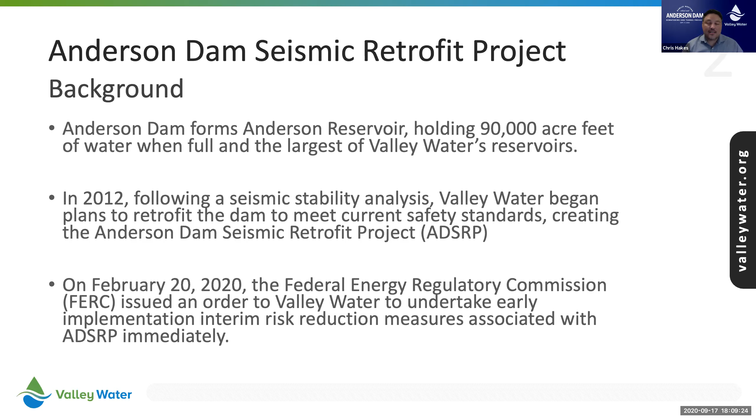That happened, not an earthquake, but the level above the seismic restriction happened in 2017. So that kind of spooked them in conjunction with what happened at Oroville, where they saw that there might have been an imminent dam failure. They wanted to basically be extra safe. So they requested that we do several things, or directed, I should say, us to do several things.

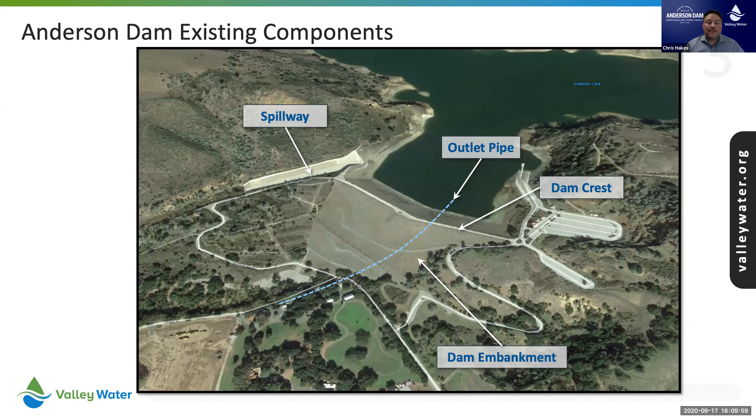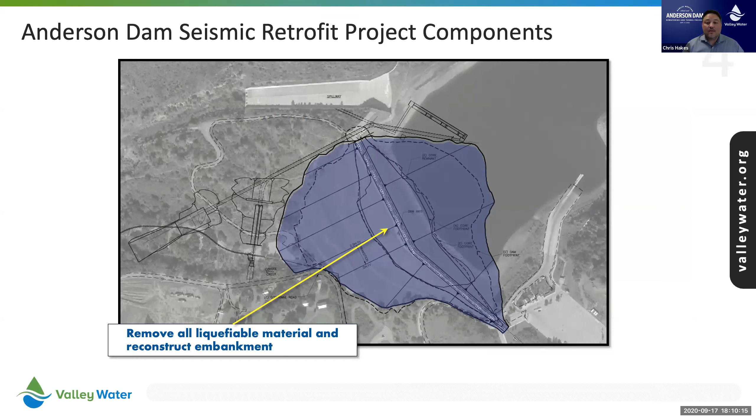We have our dam crest, which is basically just the roadway that runs across the top of the dam embankment, and the dam embankment itself. This was the seismic retrofit project after a few evolutions. You can see here we're going to remove all of the liquefiable material and reconstruct the embankment so it doesn't liquefy. So basically, originally when the project was envisioned, they thought the seismicity in the area and the suitability of the soil was such that we could just add more material to the downstream face of the dam. So that's the dry face.

Unfortunately, when we went in and did our seismic studies for our geotechnical analysis in about 2016, the results came back that a large portion of the core would liquefy. If you hadn't heard the term liquefy, what it means is basically if you get an earthquake, the embankment, the dirt, kind of turns into a pudding consistency and slumps down.

So it drops down in the middle about 20 feet. As that's the case, we have to remove the embankment completely, just leave the clay core, and then reconstruct it with suitable materials.

I mentioned Oroville in 2017. Originally, when the project was envisioned, we were just going to patch the spillway, kind of look for cracks and other things, patch those, kind of spruce it up a little bit. But after Oroville, the Department of Safety of Dams, which is California's entity that controls dam safety, it's a division of the Department of Water Resources, DWR, completely revised spillway design criteria. And as a result, we have to replace our spillway entirely.

We're going to install a new low-level outlet pipe. I mentioned in the last slide that the outlet pipe currently goes under the dam crest. When the dam does liquefy, that would potentially damage the pipe. It could basically shatter in half, kink. We would lose the ability to discharge. So our new outlet pipe will go around the dam embankment through our abutment, basically through some solid rock material or material that's a little bit more suitable. And it will also be bigger. We'll be able to discharge at a greater rate.

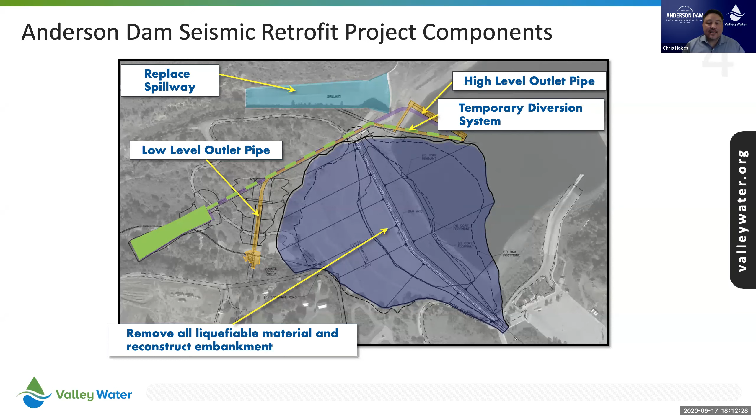And then we have our high-level outlet pipe. As part of the requirements the Department of Safety of Dams, DSOD, has put into place, we require a high-level outlet system that allows us to drain about 30% of the reservoir capacity in 7 days if directed to in case of emergency.

So what happened on February 20th? Our dam crest is about elevation 647. That's basically above sea level. We had a restriction in place of elevation 592. That is the level to which, even if the dam slumped during an earthquake, we would still be able to retain all the water behind there.

FERC on February 20th said they wanted us to immediately lower the restriction to elevation 565. At elevation 592, we have about 58% capacity of the reservoir, about 50,000 acre feet. Down at elevation 565, it's about 35%. We were already in compliance when they gave us that direction because we were in our winter operations, so that was not a big deal.

But then they also directed us to take the necessary measures to prepare to drain to elevation 488. That's called dead pool. As Director Varela mentioned, it's the lowest practicable level that we can drain to. And what that means is that's the lowest level we can drain the reservoir to with the existing piping that's in place out there right now. That does not mean the reservoir is empty. We still have about 2,700, 2,800 acre feet at elevation 488, but it's a lot less than what we have now. It's about 3% total.

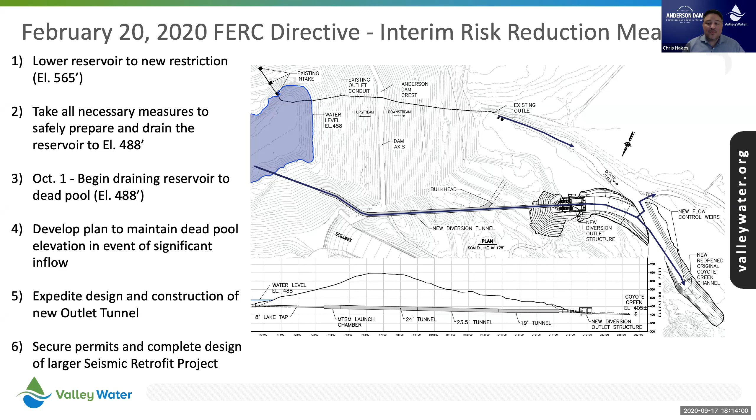We are supposed to develop a plan to maintain dead pool, obviously start draining to dead pool on October 1st. And then here's the key, we are supposed to expedite design and construction of the new outlet tunnel. You can see this is the plan view of our new diversion structure and outlet tunnel. That's what will give us the extra capacity to better control the reservoir. The last thing they tacked on was obviously to move the larger project forward, secure our permits, and complete our design.

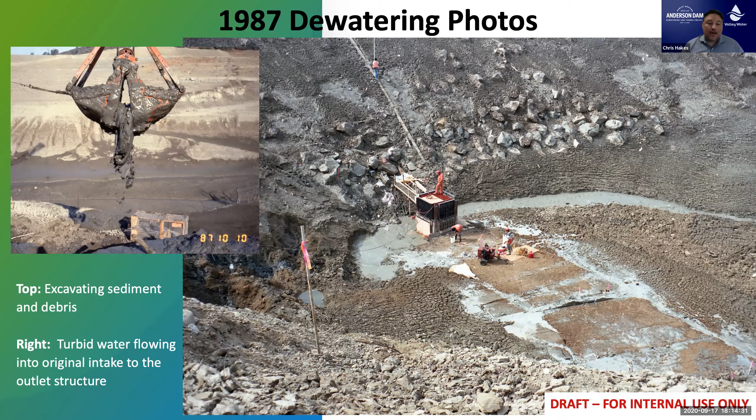What does it mean? Well, we're not going to have any boating starting October 1st, basically through the duration of the project. There won't be enough water in the reservoir to utilize the boat ramps. And when it's dry, of course, there'll be no boating allowed at all. So that could be 10 years. We're hoping to finish sooner than that, but there will definitely be boating restrictions.

There will additionally be hiking restrictions and recreation restrictions in the area. When the reservoir is completely drained, it will be an active work site. There will be stockpiles of material and equipment, so it won't be a safe environment. And even when it's drained in the interim, when we're building the tunnel, it'll be kind of water in the middle, but muddy on the slopes. So there's the possibility that someone could get kind of stuck in the mud. We don't want that. So basically all of the recreational activities associated with the reservoir itself will be off limits.

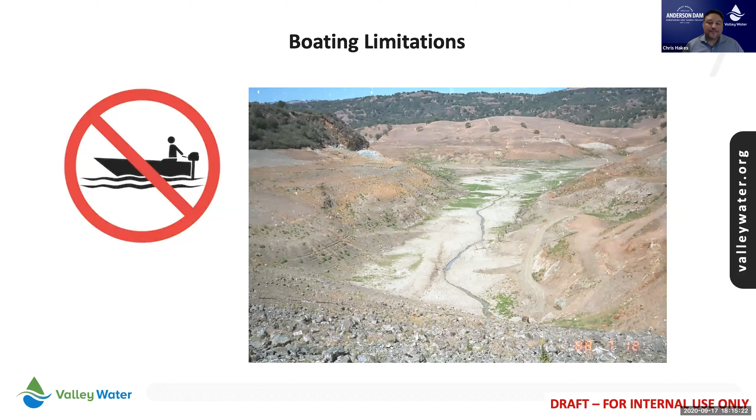As a result of draining, these pictures are also from 1987. If we drain too quickly, we could induce landslides in some of the unstable areas. Fortunately, we recognized what happened in '87, so we've submitted a plan to FERC to drain at a very measured rate in order to prevent these slides from happening. However, we are currently doing geotechnical explorations of these landslides to make sure that we can properly characterize and monitor their composition and movement if it occurs while the drawdown is happening.

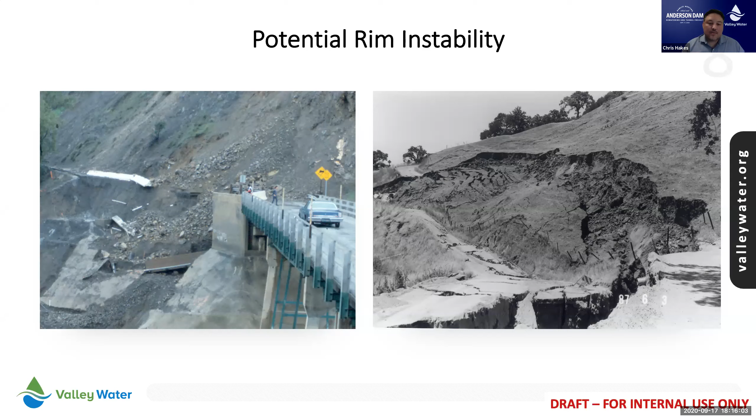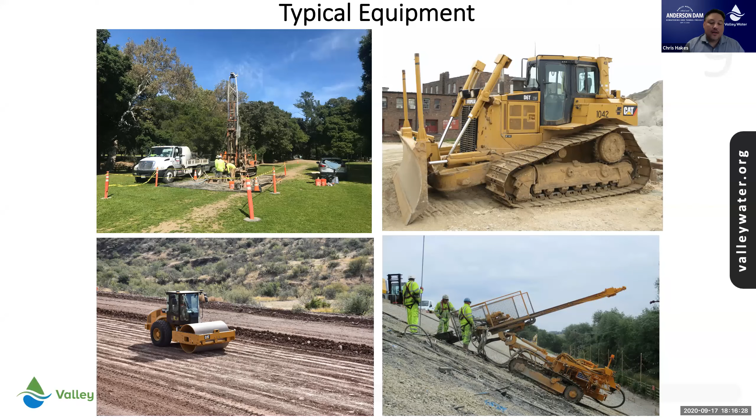We are currently out there. I believe we started on September 14th, and it will go through October 15th. These are some of the equipment you might see out there right now. The upper left corner is a drill rig. On the bottom right corner is kind of a sloping drill rig. Basically those would be used to either take core samples or install equipment. You've got a dozer in your upper right moving and grading dirt, and then you've got a smooth roller compactor on the lower left corner, and basically that's to grade the area out.

What are some of the potential impacts? Once we are down to dead pool, after a significant storm event, you'll see the water level in the reservoir rise. We are under direction by FERC to keep it as low as possible for as long as possible. So even though that water level rises, we're going to go ahead and discharge that into the creek. So you'll see a temporary rise in the reservoir level and then a corresponding increase in flows in Coyote Creek after storm events.

During construction, you'll hear noise from equipment. We will be starting construction on the tunnel itself probably around February of 2021. So you can hear engines, backup alarms, maybe you'll see some dust, but that should be under control by the contractor. That's what they're required to do. Now, work activities will primarily be Monday through Friday during normal business hours, but some Saturdays may be required. If so, usually a notification will go out to the residents that may be affected.

You may also, as the reservoir gets lower, detect some unique smells. We don't expect a fish die-off with 2,300 acre-feet of water. We still expect that the fish will be able to survive, at least initially. But if the water does get warm, we could have a lot of nutrients and algal blooms. That tends to deplete the oxygen levels, and we can get a hydrogen sulfide smell. It's the typical rotten egg smell that you may have smelled before, kind of next to a sewer. That may also affect some of the wildlife in the area if they're still present. It will really depend on the climatic conditions.

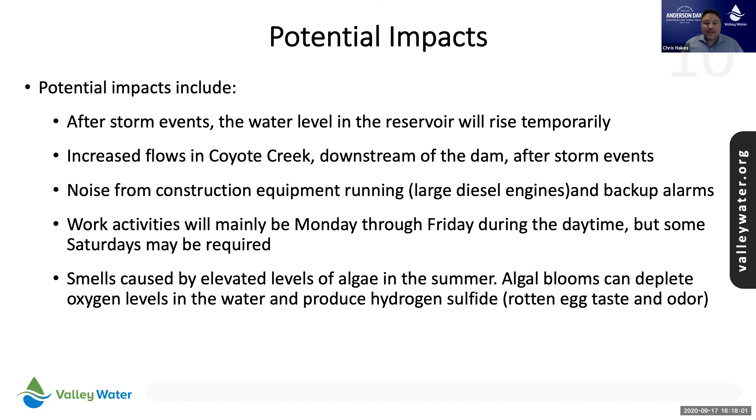In terms of our project schedule, I would focus on the upper schedule because that is what we're currently dealing with, the Anderson Dam Tunnel project, which was created as a result of the FERC order. We're currently at 100% design. Our plans and specifications have been submitted to the regulatory agencies for permitting and approval. We expect to go out to construction early 2021, February. And then we will be at dead pool, elevation 488, through construction of the tunnel. The tunnel's going to take about 2 years.

We have an additional lake tap that needs to be done. So the total construction of the Anderson Dam Tunnel project is probably around 3 years. We expect to finish right around December 2023. Right after that, we'll immediately flip to the Anderson Dam seismic retrofit project. Right now, we are still showing that the project's going out to 2030 with some restoration activities in 2031. Obviously, we're trying to compress that. It's still a little bit farther out. It's really going to depend on what we find through our permitting process, what different things need to be done to mitigate the impacts of construction.

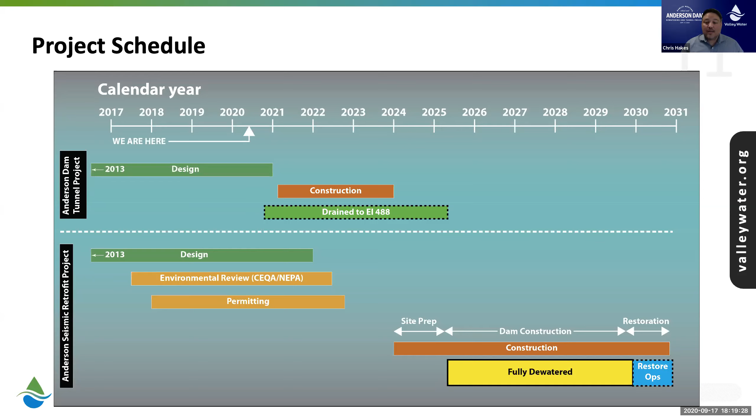But we're going to take full advantage of the window that's been given to us to try to compress that construction schedule to get done sooner. You can see right now we're looking at a fully dewatered reservoir. That's because that's what the order that FERC has given us is. If they decide to revise their order and allow a different reservoir level, we'll communicate that with the public.